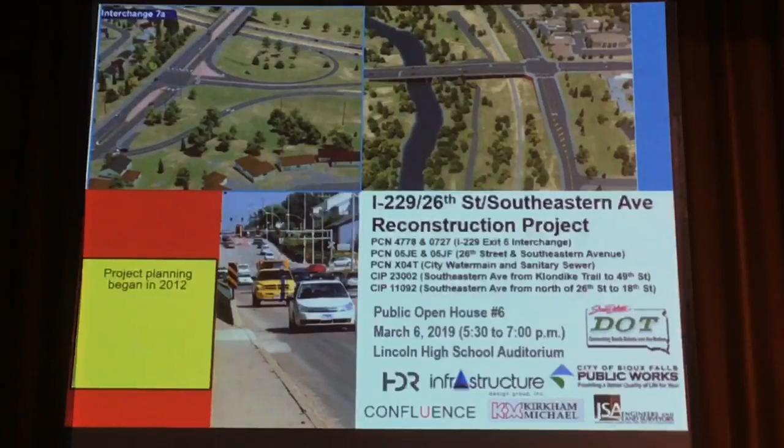To give you an idea of how long ago that was, in 2012 when we started the project, I had few, if any, gray hairs. And now, ouch. My kids tell me that I look more distinguished and mature. My wife says I just look old now. But whether it was just the time factor or the stress of the project, I don't know. Like I say, it's been a privilege to be part of this type of project.

We had our first public meeting in July of 2012, and I would like to ask, were there any of you here tonight that were at that very first public meeting in July? We have a few takers on that, yes, thank you very much. Then we had our last public meeting, number 5, in May of 2016. So we are now on public meeting number 6. Was there anyone here that was at all of the previous 5 public meetings? Yes, we have some takers. Thank you very much for being part of this process.

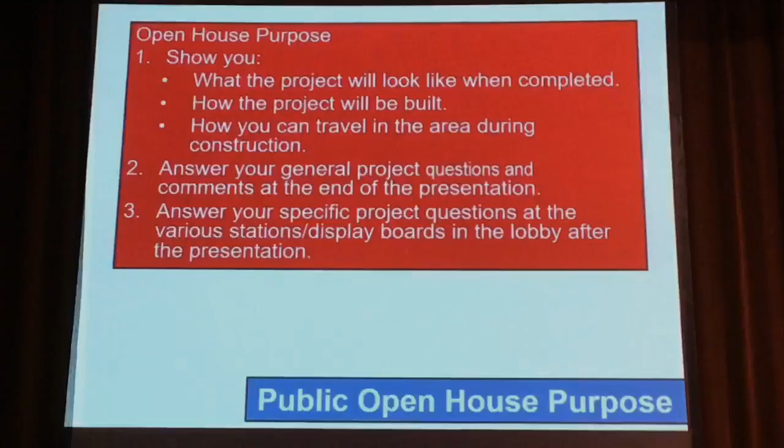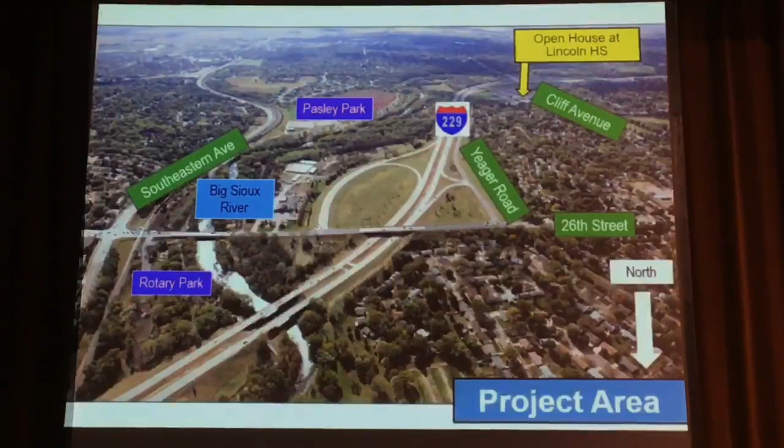Here we have our project area, and just a couple of highlights here. 26th Street is going across the screen right to left, and we're looking south on I-229. Here is Cliff Avenue on the right side of the screen, Southeastern Avenue on the left side of the screen, and we are all sitting here tonight now in this Lincoln High School auditorium. This area here, Rotary Park, when these pictures were taken, that was a kind of a wild tree area.

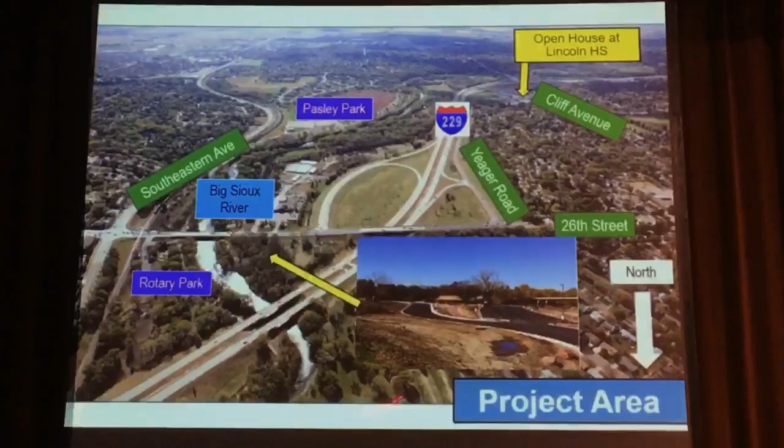What you saw last year was all of those trees being cut down and a parking lot and some buildings going up. We didn't quite get all of the playground features finished last year, but we will get that done early this year. The reason for that new Rotary Park was that the old entrance to Rotary Park, right here, when we raise up 26th Street, that entrance to the existing Rotary Park will be cut off, and there will be no way to get to it.

So we have Rotary Park over here, and many of you saw this pedestrian bridge going across the Big Sioux River, right about in that area, and that will connect the new Rotary Park with the old Rotary Park.

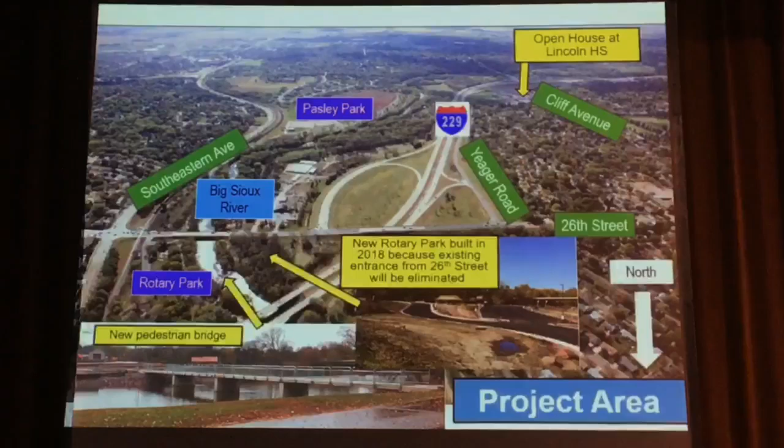So you saw some work being done last year, and I should say, can everyone hear me with the microphone here? Maybe the screen is a bit small, but hopefully you can at least hear me. Okay, hang on a second.

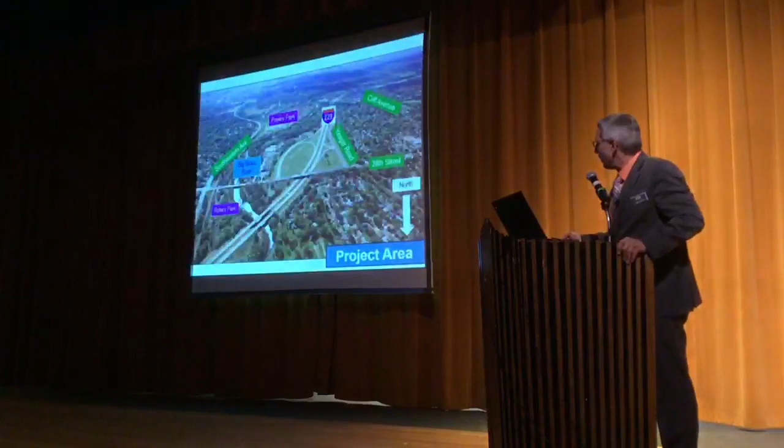And we're going to go now to some animations. This is the interchange, looking now towards the north with I-229 to the north, 26th Street going across your screen like this. This is what it looks like today. Way back in 2012, 2013, we considered up to 20 different options for improving this interchange and making it a safe and traffic efficient interchange.

And I'm going to show you one of the animations that we did in 2014. I'll start this. It'll come right up here.

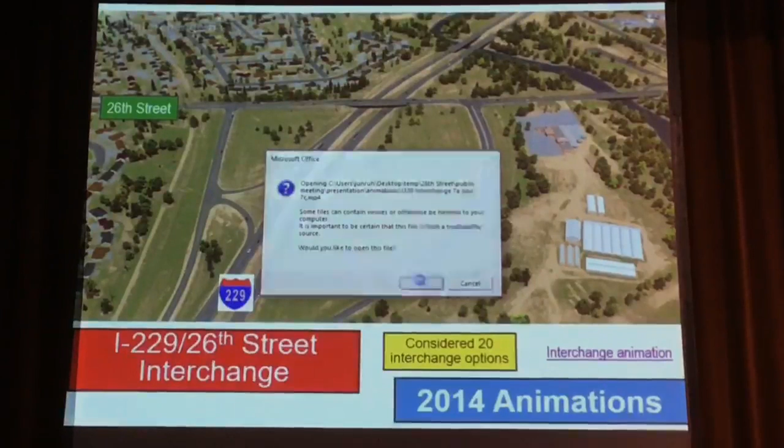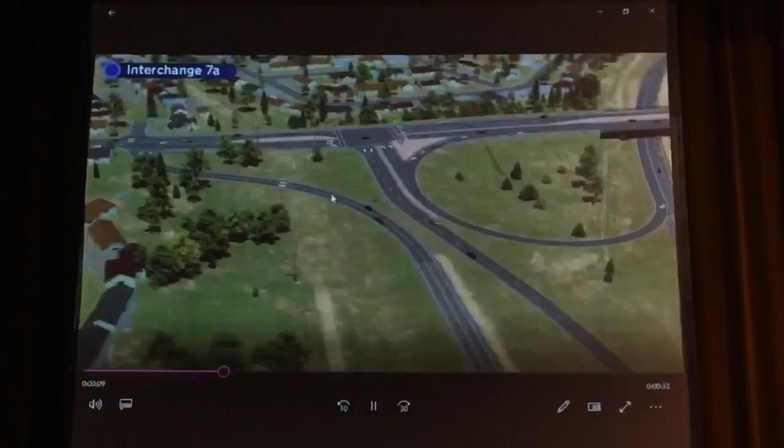Okay, this is an animation of what the interchange will look like when it's completed, and I will stop this partway in and give some key points. All right, so we're looking, this is pretty much toward the northeast. This direction here is 26th Street. Some things I want to point out.

Yeager Road now connects to 26th Street. When we are done, Yeager Road will be curved around and will connect to 26th Street over here across from Frederick Drive. The I-229 ramps will connect to 26th Street where Yeager Road is now. If you are traveling south on I-229 and want to get onto 26th Street, you'll come around this loop, and this loop will then connect to 26th Street.

If you want to go east on 26th Street, you'll have your own lane all the way over to Southeastern Avenue. So you see 3 lanes on 26th Street going over to Southeastern Avenue. When you want to get onto I-229, you'll get on the ramp here and you'll get directly onto I-229. You will not have to turn again at Yeager Road like you do now.

I'm going to let this continue to run here. And this other scenario that you're going to see is essentially the same thing, but just from a slightly different perspective. And the one thing I want to point out here is this intersection, significantly larger than the existing intersection.

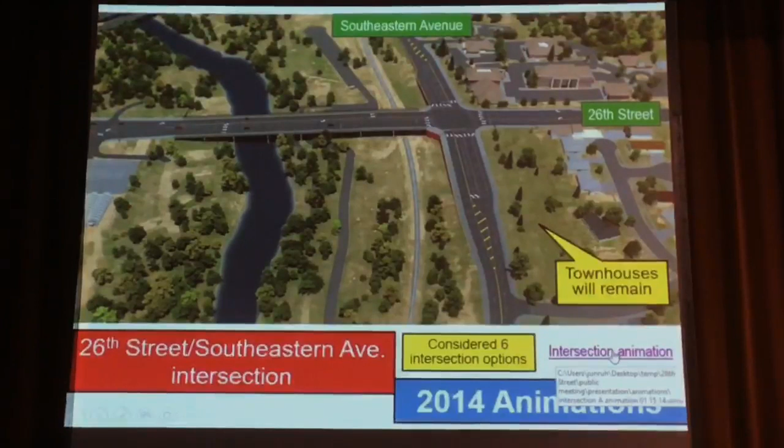So we're going to start this and just let it run, and that will show you what this will look like when it's finished. A very dramatic difference from what it looks like now. And I'll do just a couple of comments as we go around. Again, these animations really helped people and all of us on the design team just understand what it would look like. Here we're looking on Southeastern Avenue to the south.

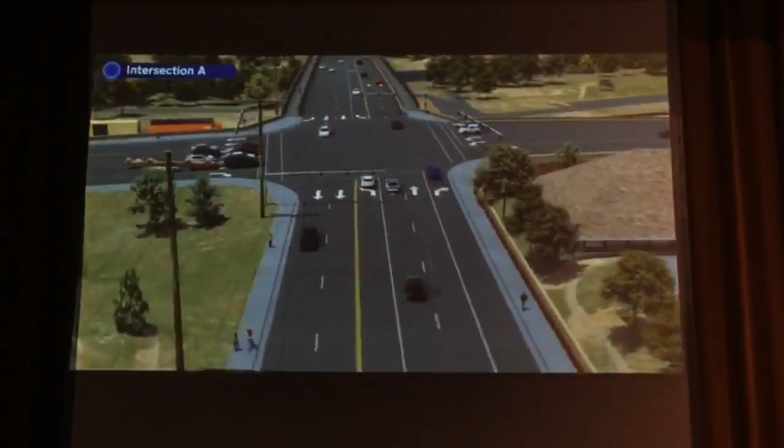Here's the railroad tracks, and here's the bridge over the railroad tracks. We'll have dual left turn lanes on Southeastern Avenue and four through lanes, 2 lanes in each direction on Southeastern Avenue. Here we're looking west on 26th Street, and not much capacity increase over here.

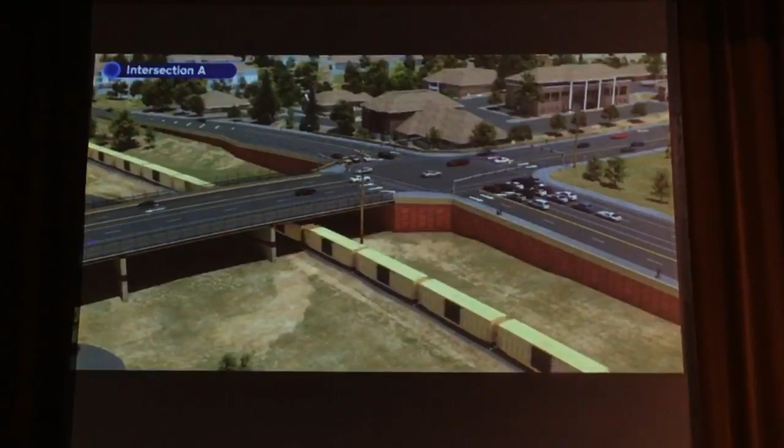That will stay the same on the east side of Southeastern Avenue. Now we're looking north on Southeastern Avenue. Here's 26th Street, with dual left turn lanes to get onto 26th Street. That movement backs up every day, as all of you are aware. Notice the nice wide sidewalks along the sides of the streets, another marked improvement for this area. But unless we had these types of animations, it would be very difficult to comprehend what this will look like when we're done. All right, we're going to move on to the next slide.

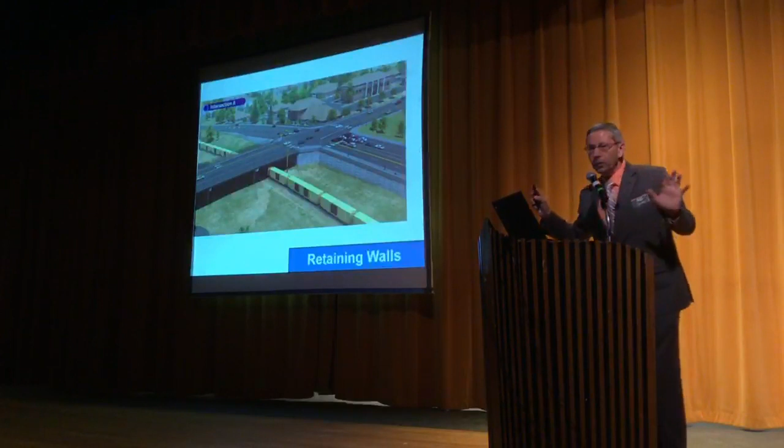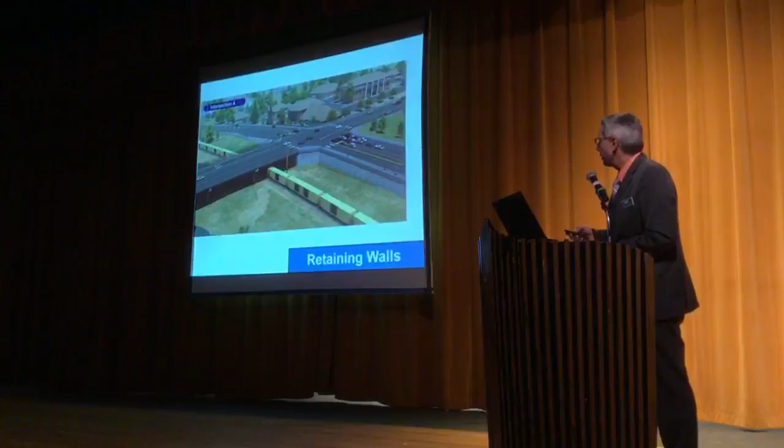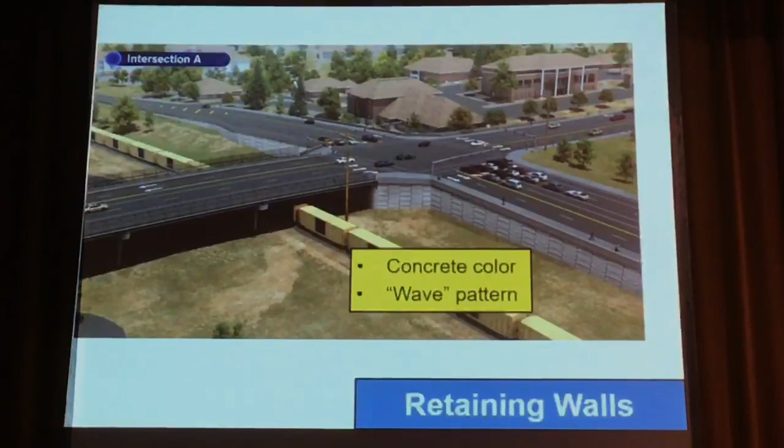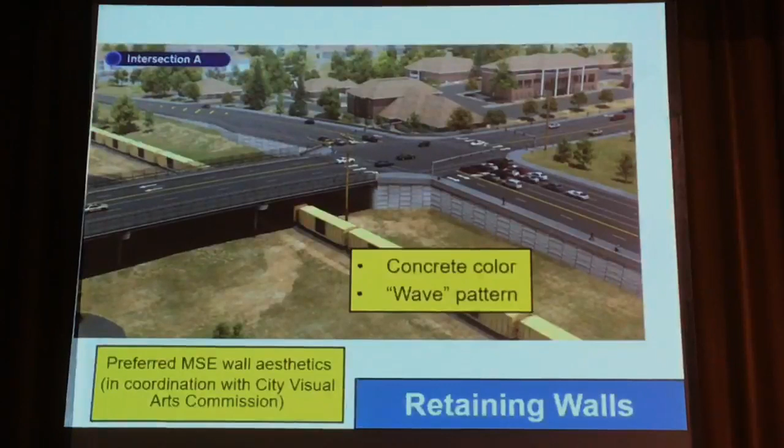You saw the red coloring on those walls in the animation. Well, since then we've done some additional work, and what you see here, these gray colored walls, is what will actually be built. More of a concrete color, and we're going to use a wave pattern on these walls to match the setting of the park system, the Big Sioux River, and the Big Sioux River Trail. These aesthetic treatments were developed in coordination with the City Fine Arts, City Visual Arts Commission, so we had quite a bit of input on how to make these things look very nice.

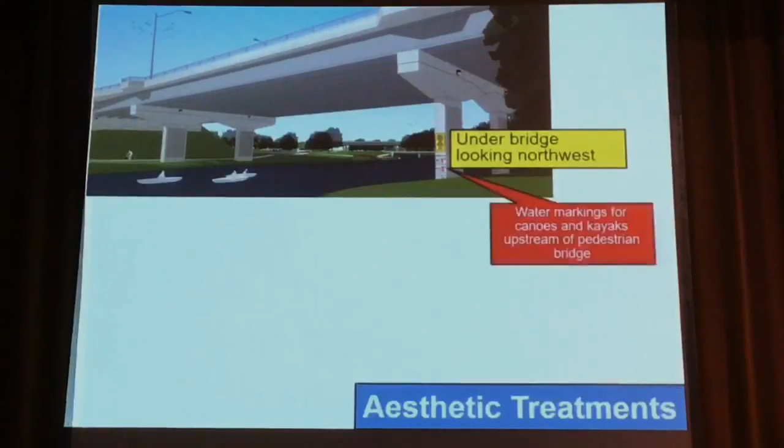Here's a slide looking underneath the new bridge. This is looking towards the new Rotary Park. Here is the pedestrian bridge going across the Big Sioux River. On the bridge pier, there will actually be red numbers that will tell canoers and kayakers that if the river level gets up to one of those, you probably want to get out of your canoe or kayak and walk around that bridge. Although I'm sure there will be many people that try to scoot underneath the new pedestrian bridge.

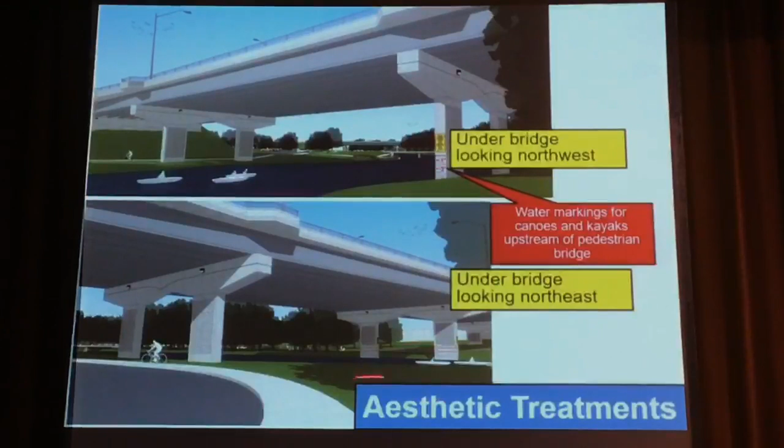Here we are looking underneath the new bridge towards the northeast, and here is that big retaining wall along Southeastern Avenue that you saw. Here's the Big Sioux River. Again, we went with a concrete color and a wave pattern on, for example, the edges of the bridges and on these bridge piers. We think that will also be very pleasing to look at, and again, this was developed in coordination with the City Visual Arts Commission.

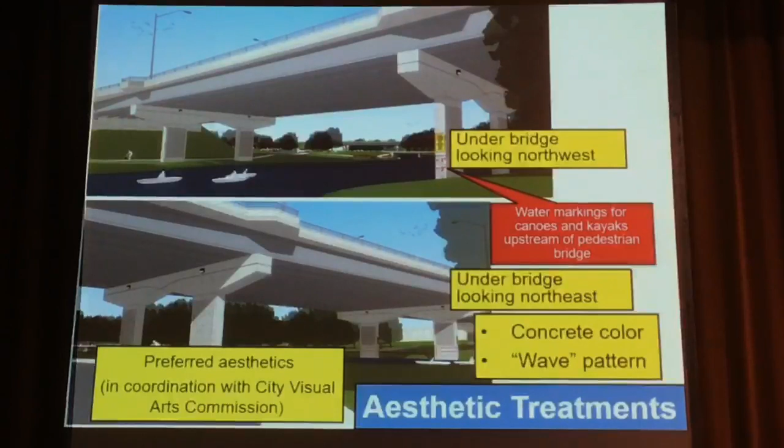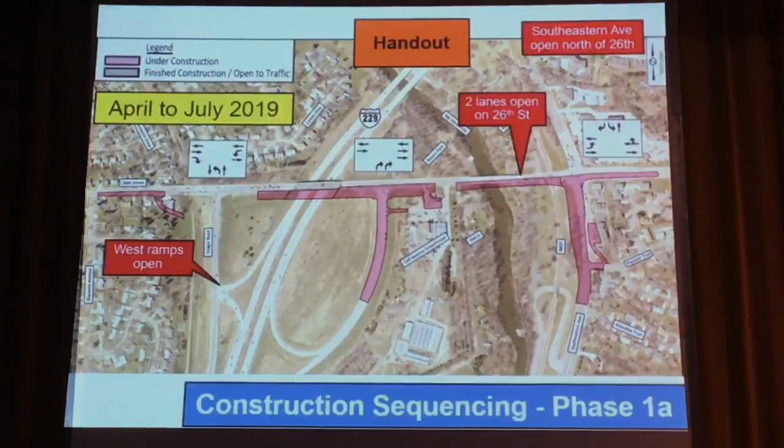Again, I apologize for the small screen, somewhat hard to read, but we will keep 2 lanes of traffic open on 26th Street throughout construction. Southeastern Avenue north of 26th Street will remain open during phase 1A. The west ramps that connect now to Yeager Road will also remain open. We'll be building the south side of 26th Street, essentially widening out to the south side, and we'll also be building this northbound on and off ramp, but we will maintain 2 lanes of traffic on that, for the people coming off of I-229.

As you know, this movement backs up onto the ramp, onto I-229 nearly every day, so we're actually going to make 2 right turn lanes to go east on 26th Street. We will also be building a new access from the ramp to the Cliff Avenue greenhouse site, and we will maintain the existing access over here to the Cliff Avenue greenhouse site during this phase 1A.

What happens on Southeastern Avenue to the south is that we will be closing it, closed to Klondike Trail right over here. Then all the way down to 49th Street, the city will be doing a project involving some sanitary sewer work and overlaying the existing pavement, with 2 lanes remaining open and 2 lanes closed on Southeastern Avenue all the way down to 49th Street. It was an opportune time to do these projects together while traffic is impacted all in just one year.

Notice here there's no left turns going onto this ramp, so that will be a traffic impact. Also, there are 2 right turn lanes coming off of the ramp, and they will merge very quickly to 1 lane going east. We recognize that will be a constraint for traffic and probably a site of congestion.

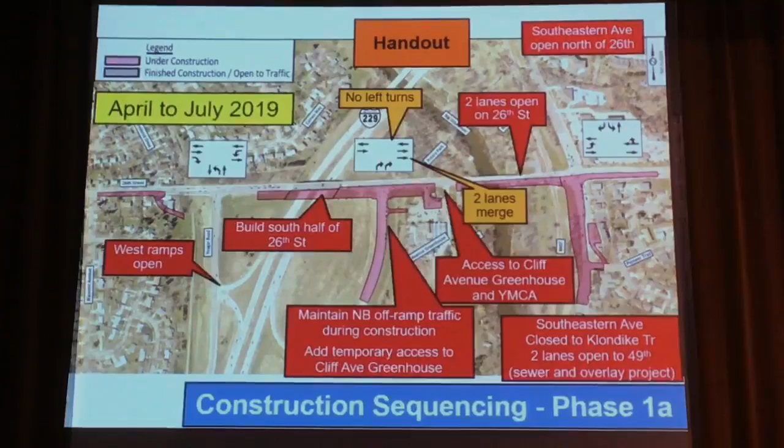Let's go to 1B. The only thing different here is what's shown in gray, which is what has been completed. This is in your handout, and it will extend from approximately July to the end of the 2019 construction season, probably November 30th, depending on weather. We will keep 2 lanes of traffic open on 26th Street, 1 lane in each direction. Southeastern Avenue north of 26th Street will remain open to traffic. The west ramps will be closed for construction, and Yeager Road will also be closed. We will continue to build the south half of 26th Street, but the east ramps will be completed, along with the new entrance to Cliff Avenue Greenhouse by that time.

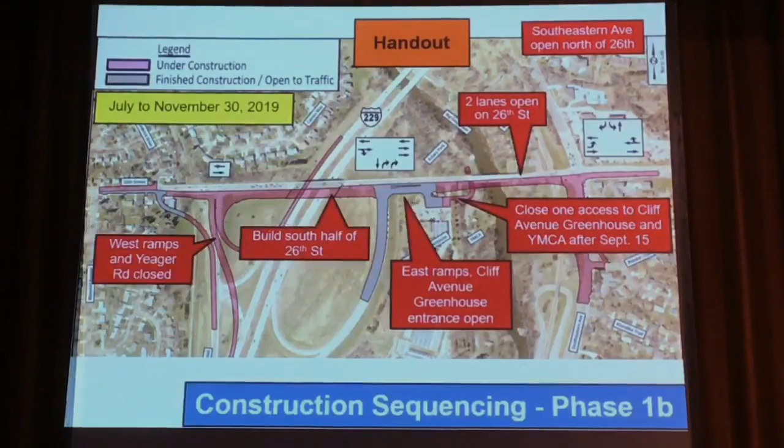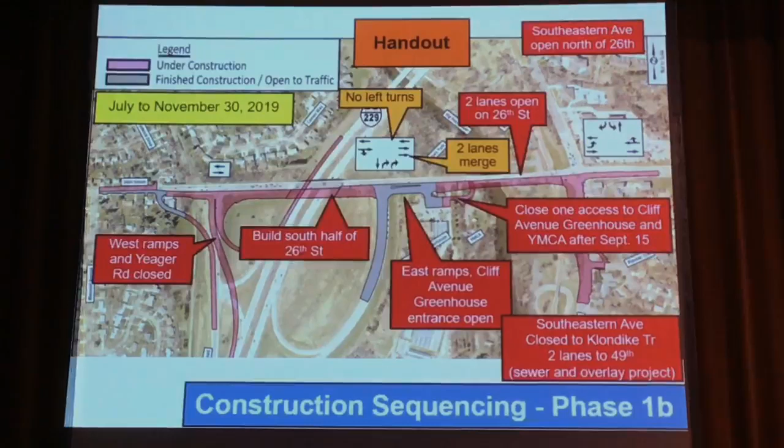Then we will close the YMCA and the other Cliff Avenue Greenhouse entrance, and YMCA will shut down their operations after September 15th, so all access to the YMCA day camp will end after that date. Southeastern Avenue will be closed down to Klondike Trail, then just 2 lanes of traffic all the way down to 49th Street. Again, no left turns, even though this ramp will be open. The congestion just won't allow us to permit left turns from 26th Street westbound onto the ramp, and those 2 right turn lanes will merge relatively quickly to 1 lane.

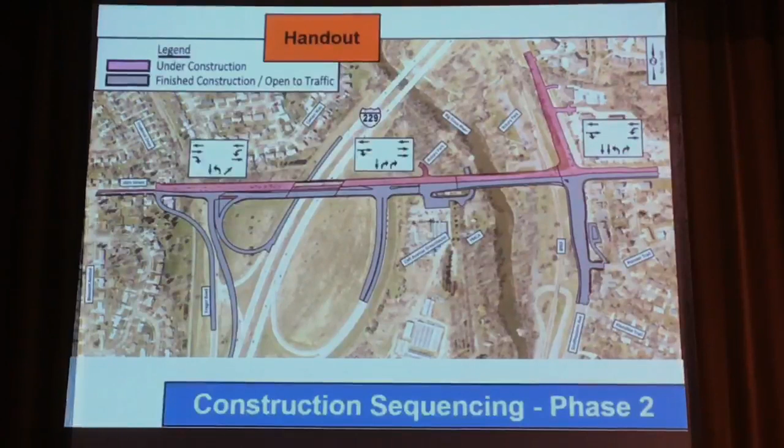Then in year 2, which we call phase 2, this is also part of the handout you received. This will run from April to November of 2020, the 2nd year of construction. Now all of the new lanes on 26th Street will be open, and we will keep 26th Street open to 2 lanes of traffic, 1 lane in each direction. This will now be on the new lanes and the new bridge over the Big Sioux River and the railroad tracks, and all of the ramps will be open. This will be a dramatic improvement in traffic conditions compared to year 1.

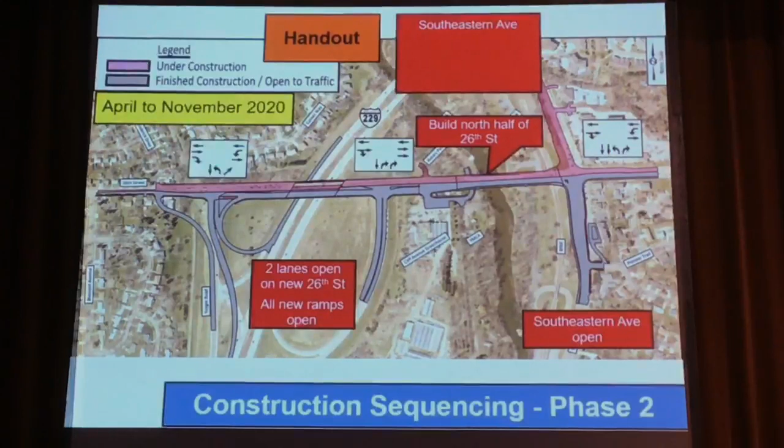We'll be building what you see in pink here, the north half of 26th Street. Southeastern Avenue will now be open south of 26th Street, but north of 26th Street it will be closed to the River Ridge Oral Surgery driveway. North of that, Southeastern Avenue will be reduced to 2 lanes, maintaining only 1 lane of traffic in each direction all the way to 18th Street. During that time, the city will be widening Southeastern Avenue so that when we're done, there will be 4 lanes all the way from 26th Street to 18th Street - a dramatic increase in capacity.

Some pain to get there, however. Again, we will not allow left turns at this ramp, and the two right turn lanes will merge down relatively quickly. So that's going to be a traffic constraint that all of us will have to be aware of.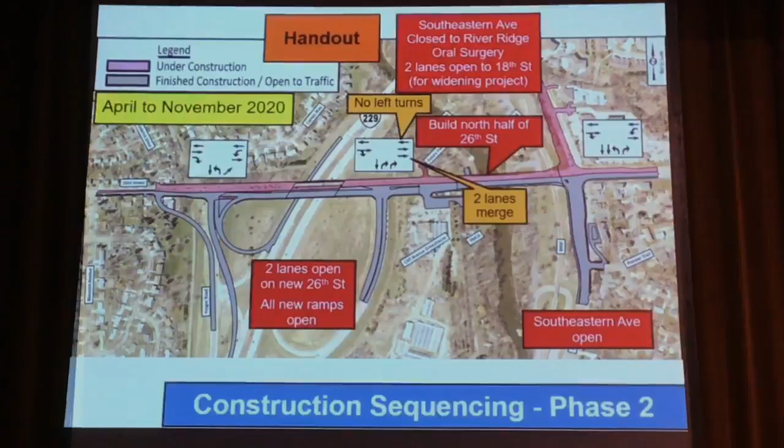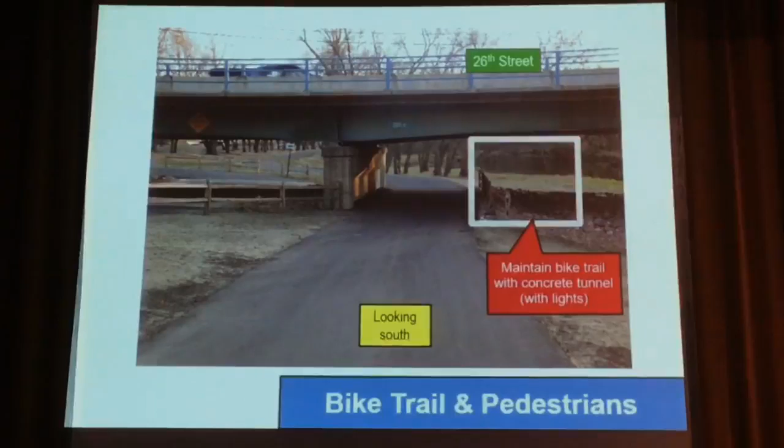What happens with the bike trail and pedestrians? Here you see a picture looking underneath the existing 26th Street Bridge along the bike trail, looking south. What we are going to do is install a concrete tunnel underneath the existing bridge, extending out quite a ways - actually a 200-foot long tunnel - going through much of the construction zone. We will have lights inside that tunnel, so you'll be able to go through it and still use the bike path on each side.

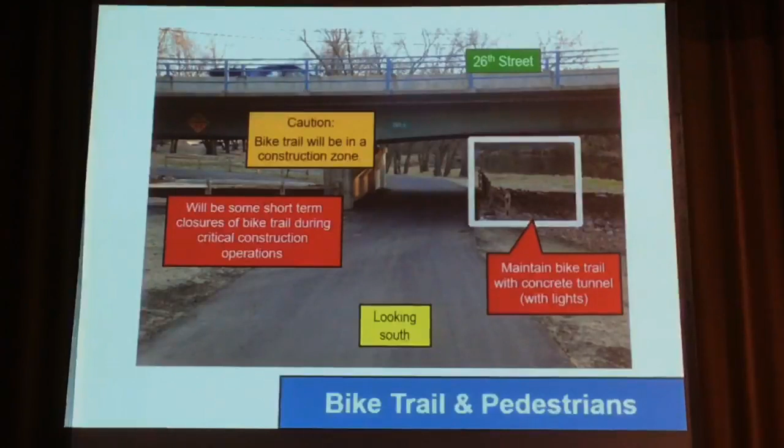There will, at some times, be short-term closures of the bike trail for critical construction work. Just remember that the bike trail will really be in a construction zone, so for users - walkers and bikers - it will still require quite a bit of caution. We'll have lots of barriers and signs, but it will still require caution by everyone who uses the bike trail.

Traffic. This is why we're all here tonight, I think, is to see what happens with traffic. Here you see a picture of 26th Street like you see it pretty much every day. Southeastern Avenue back here, 26th Street right here.

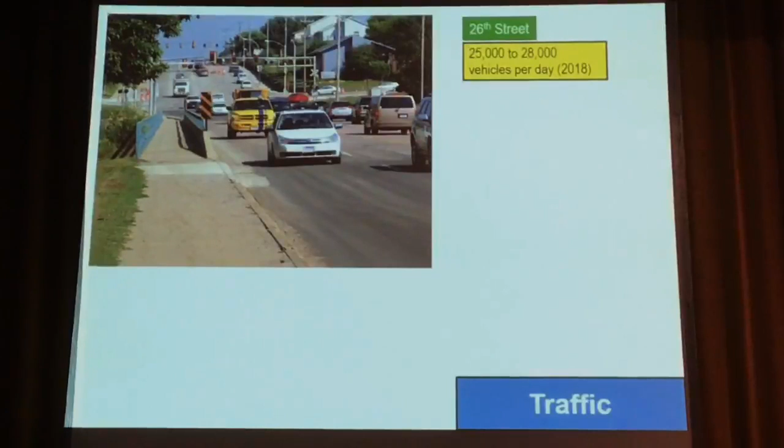Today, there's somewhere between 25 to 28,000 vehicles per day on 26th Street, depending on where you're at, but within our project limits, 25 to 28,000 vehicles per day. On Southeastern Avenue, there's between 8,000 and 12,000 vehicles per day that travel on Southeastern Avenue every day.

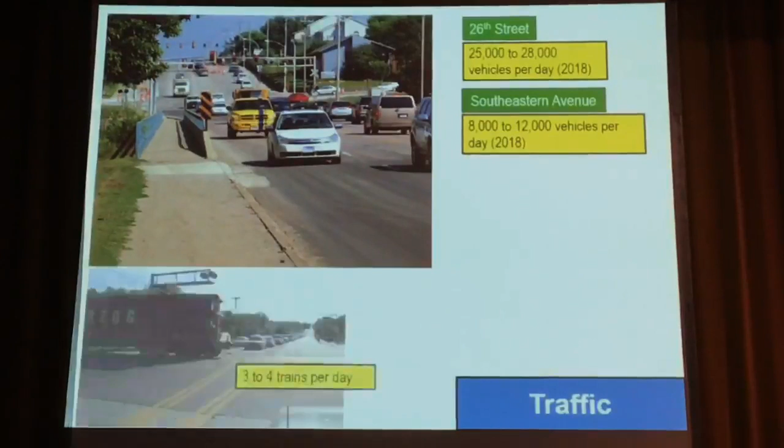We have about 3 to 4 trains per day that cross 26th Street. And invariably, it seems like one of those crosses right during the peak traffic periods. I think we're all well aware of that, and we've all sat in that traffic backup that you see on the slide here. That's what we're dealing with.

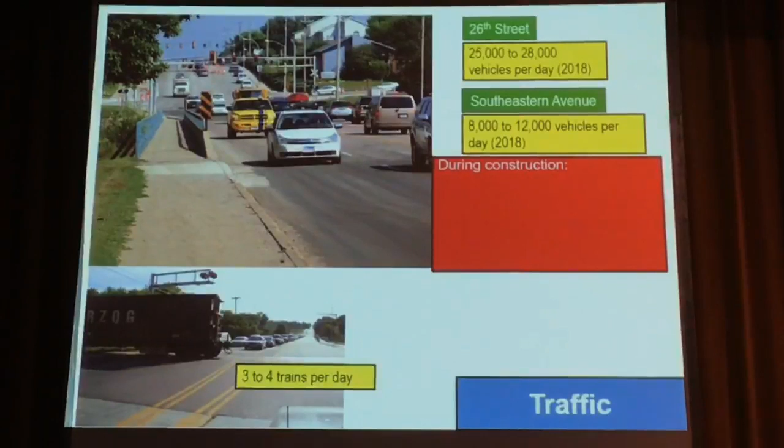Okay, hopefully you can see this slide. What happens then during construction? Well, 26th Street goes from 4 lanes to 2 lanes during construction. Southeastern Avenue at some point will be closed either north or south of 26th Street. And the railroad tracks will also be making some changes. There will be just 2 lanes crossing the railroad tracks, and there will be arms that drop down from new railroad signals that will be installed. So pretty significant reduction in the amount of traffic that can get through this area.

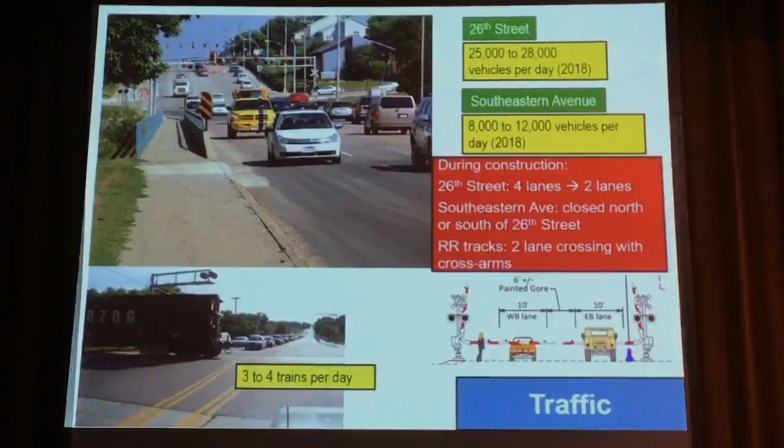And I said, what you want to do then is go over to Sycamore and take a left turn at Sycamore, and then stay on Sycamore, go right through the 26th Street intersection, and then turn left at 10th Street, and then take 10th Street to downtown.

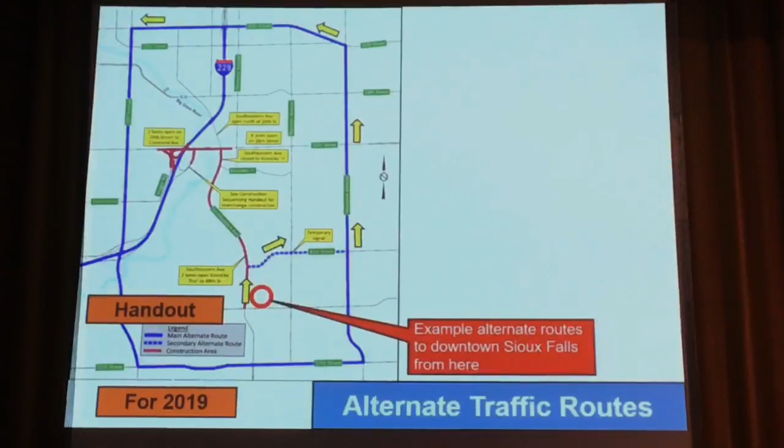Okay, we are all well aware that 10th Street has a lot of traffic on it already, and so we're saying, okay, we're going to put more traffic on it. So I said what you might want to also consider is if 10th Street, if you're having trouble getting through there, you could also turn left on 26th Street here from Sycamore and go over to Southeastern Avenue. Keep in mind, in the first year, Southeastern Avenue will be open north of 26th Street, and I suggested then you'd be back on your old route to get to downtown.

For each person that drives this area, there's going to be some uniqueness in where you're coming from and where you are going to. So this is just an illustration of how one person could navigate it.

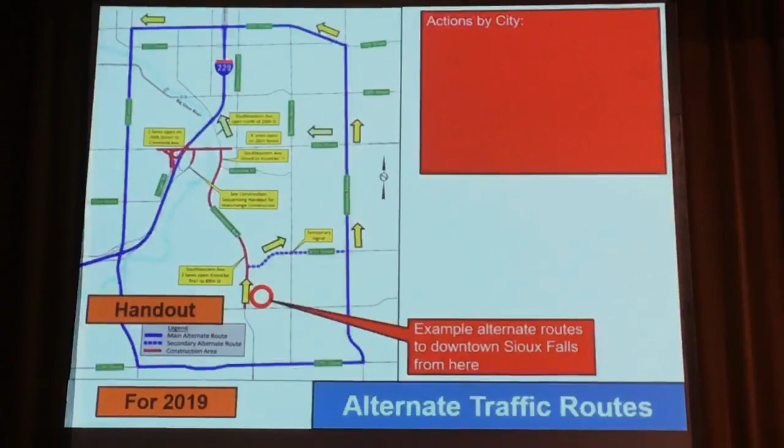Now, the city is going to be doing some very specific things, and if you can't see these, I will just tell you what they are. First of all, the city will be adjusting the signal timings on these alternate routes. And these alternate routes are the ones that are in blue here. Basically 10th Street on the north side, 57th Street on the south side, Sycamore on the east side, Cliff Avenue on the west side, and I-229 will also remain open.

So if you're trying to use the 26th Street interchange and there's ramps that are closed, you can use the 10th Street or Cliff Avenue interchanges instead. But the city will be adjusting the signal timings before the project and during the project on all of these alternate routes to adjust to what the traffic is really looking like out there.

The city will also keep these alternate routes construction-free while we have all this additional 26th Street and Southeastern Avenue traffic on these alternate routes. The city will also have cameras up on some of the poles to watch what's happening at each of these intersections, especially in the project area where we're working. They will monitor that in real time at City Hall and can adjust the signal timings in real time to reduce the delays people are experiencing.

Okay, what can commuters do? These are the things that all of us as commuters can do. First of all, like I told my daughter, you will probably have to try various routes. One route might be really blocked up and you might want to try a different route the next day, and it might change through the course of the construction season, so you'll just have to try different routes. You might also want to try various time frames for getting to and from work. That's not an option for everyone, but if it's possible, you might want to consider going at times when traffic isn't quite as busy.

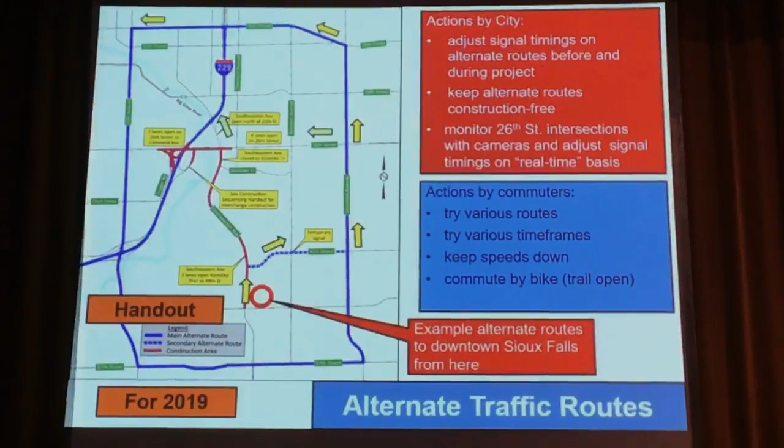How about commuting by bike? As I said, the bike trail will remain open, so that's certainly a possibility, and you won't be fighting vehicle traffic. So that's a possibility as well, certainly when the weather is nice.

Finally, we do ask that people be patient. I'm as aware of it as anyone that when you're sitting at a traffic light, two minutes seems like the end of the world. There was one signal I thought every time I went through it took forever to get through, and then I timed it once and it was like a minute and a half. It's like, oh my gosh, that's a very short amount of time, but when you're sitting there, it seems like forever. There will be times when at some of these signalized intersections it might take two cycles, even three cycles to get through, and we will just ask for patience. When we're done, this will be a wonderful project, and traffic will move very smoothly through this area and much more safely. But during this two-year construction period, we will be challenged. I think all of us are aware of that.

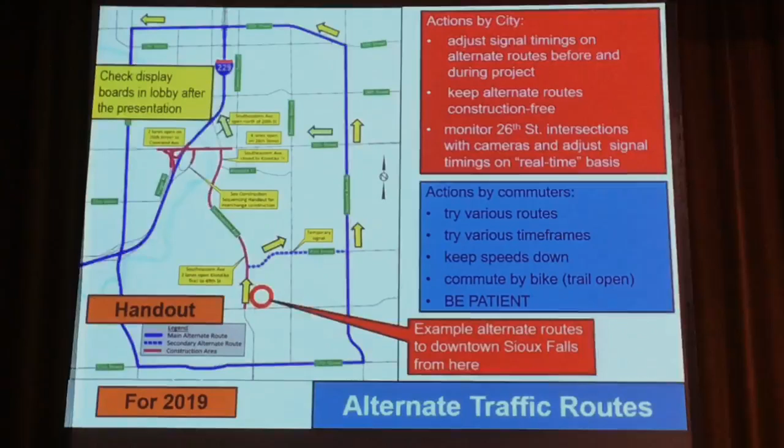If you have specific ideas or questions about how to get around the area, we actually have two of these display boards set up in the lobby, and two gentlemen back there that can direct you. If you give them the place you're starting from and going to, they can make suggestions for specific alternate routes.

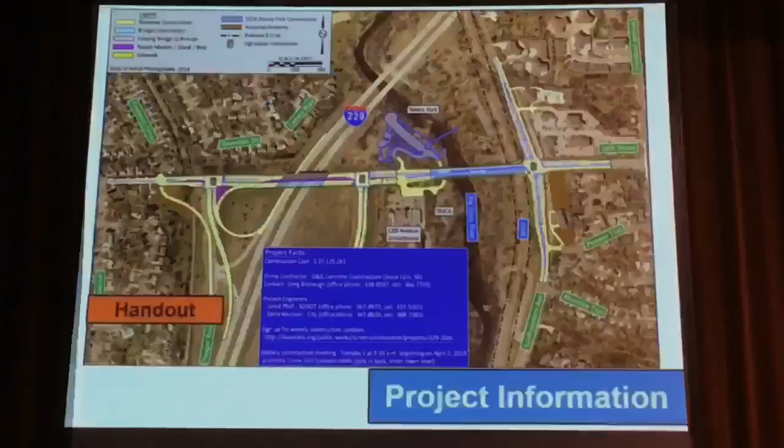Okay, this is a map that you also see, I'll blow the lettering up. A handout that you received, with some project facts. Again, you're not going to be able to see this due to the size of the screen, but there is a significant investment with this project. $37 million is what the construction cost will be for this project.

The city and the South Dakota Department of Transportation are making a very significant investment, an investment that really benefits us and our descendants probably for one or two generations. Something like this is expected to last 75 to 100 years. So it is something that we want to make look nice, we want to make very functional, and we want to make enjoyable for everyone today and in the 20 to 50 to 75 years, even up to 100 years in the future.

That being said, we have some people we want to introduce. The prime contractor is D&G Concrete Construction, and I'm going to ask these folks to come up so you can see a face. These phone numbers you see are in your handout as well, so don't worry about seeing it up there, you can look there. The prime contractor is Greg Branagh of D&G Construction out of Sioux Falls, South Dakota. Most of you are probably aware of the Louise Avenue project improvement that D&G Construction did in 2017. There are some phone numbers there, office phone and cell phone for Greg.

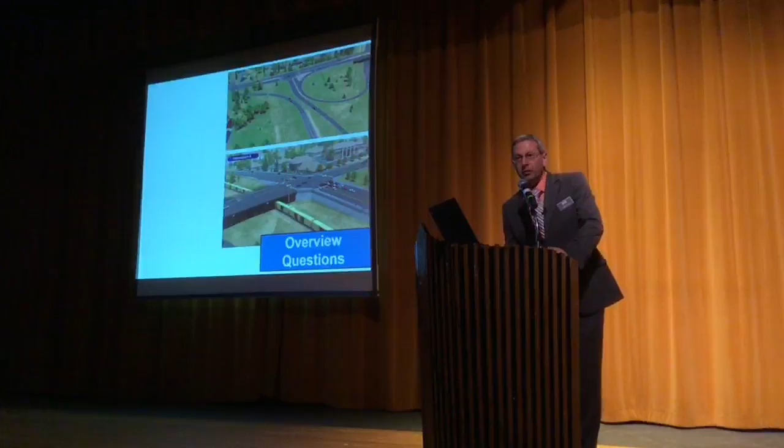Okay, excellent, that's a fantastic question. For those who didn't hear it, was there consideration for a ramp from westbound 26th Street directly onto the interstate? This system is actually designed to allow for that to be added in the future, if it's warranted. At this point it wasn't warranted, but maybe 20 or 30 years out, we designed this facility so it could add that ramp to go from westbound 26th Street directly onto I-229 northbound. During construction, though, that's really not an option, which is why we're basically not allowing that left turn from 26th Street onto the I-229 northbound on-ramp. Is that an adequate response, Shannon?

Yep. Okay, thank you. If you would, you don't have to give your name, but just speak into the microphone. We live on Klondike Trail, and I can see traffic traveling from 49th over to Klondike, shooting up Klondike to Cleveland, and then going downtown. You haven't mentioned anything about Cleveland Avenue and the connection that Cleveland and Klondike has to Southeastern. We already are experiencing a lot of traffic coming from Sycamore, Benson, Cleveland — they are coming down that road very rapidly, I might add. We have children in that area, and those cars are zooming down towards Southeastern. Right now they're connecting so they can go north, but I can see a lot of traffic heading through that area, and that concerns me. Is there any suggestion on what can be done — either like a live body laying on the road so we have a speed bump, because that will happen. My grandson almost got hit on that road.

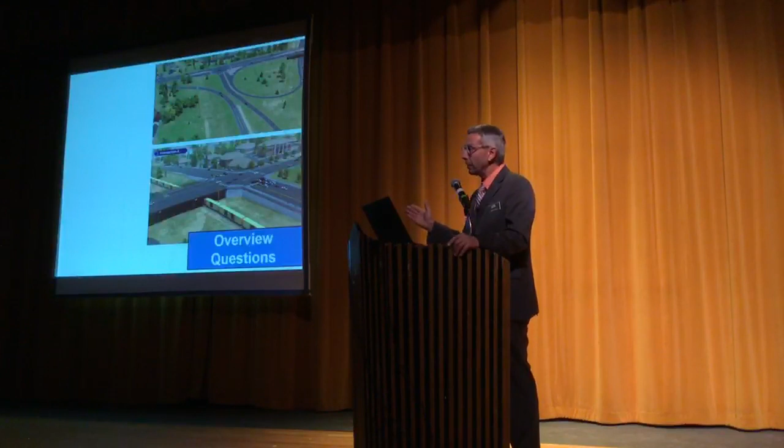Those were designed so that when we see a flood coming, we can actually drop them down - they hinge down, so we really couldn't do anything real fancy with those. They also have pins so that if they're up and a flood comes through quickly, if something hits them like a log, they will actually just break over - the railings will just fall down by themselves. So we were somewhat limited in what we could do.

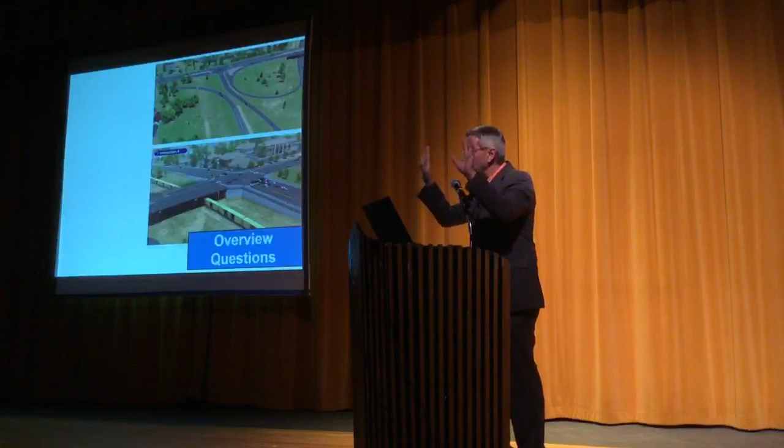That's where you'd probably want to put something nice, on the railings. If you saw on the 26th Street Bridge, we really tried to do some nice things on the railings. But you are right, we were somewhat limited on that, and that's probably the least sightly part of the bridge.

Is that a reasonable statement? That explains that very well. Thank you, and I have one more comment about the gray hair - that's when you wear a cap. Okay, thank you, I appreciate that.

Hi, Anthony Pizer. Just a comment and a question. First, the comment is I can tell a lot of thought went into this, and I just want to say thank you to you and your team for your consideration on this and improving. Thank you, appreciate that.

The question - you mentioned the temporary light at 41st and Bonson as a kind of overflow mechanism. Is there any way to make that permanent?

A lot of times those temporary lights do end up being permanent, and I know the city is looking at improving that intersection even more than just with a signal. But that's probably all I want to say about that. Typically those temporary signals do become permanent, so that's a possibility here. It will have those span wires, the wood poles and the span wires, so it'll be somewhat unsightly. But you see a lot of those around town where they work well, so they just keep them in place. So that is a very good possibility. I don't know the answer for sure, but in a lot of places that is what happens.

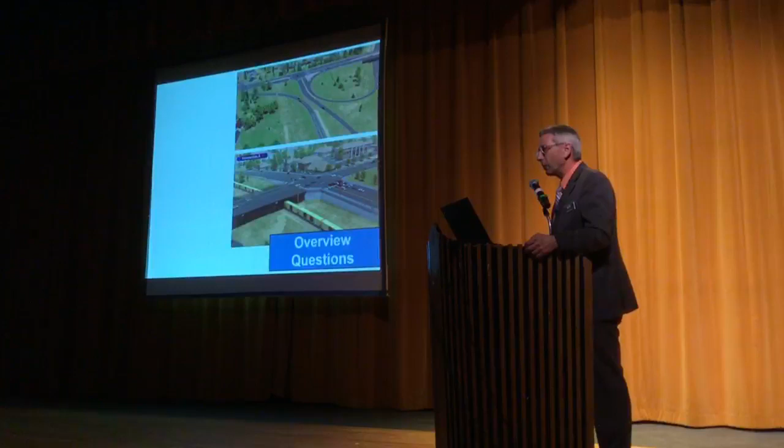Like I said, it would be mostly daylight hours. I believe the contractor gets a special permit if he's beyond - what is the time that if it's beyond, they have to get a special permit? Is it 9 o'clock? 9 or 10 o'clock, so that would take some special consideration.

Okay, and again, that's why we went with the 2-year time frame so that we weren't forced into that kind of a scenario. If it does come to that, like I say, it takes a special permit by the city, and you'd probably have opportunity to voice your concern about that at that time. But yes, construction noise is certainly a concern.

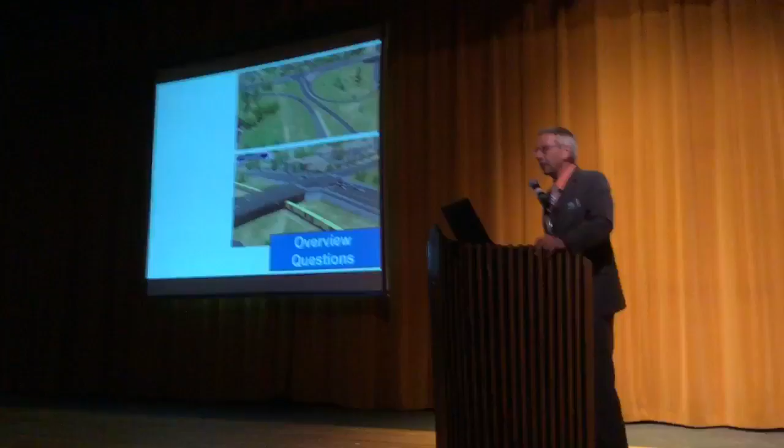And it starts at dawn? Sometimes it will, and I think, as a matter of fact, that's one of the reasons we would have those weekly construction meetings - we would ask for participation at those if it becomes really obnoxious for you. Come voice those concerns at the weekly construction meetings, and if you're hearing too much noise, then come to those and let us know that's a problem.

Okay, I'm just anticipating too that there might be a need for more police presence on 26th Street. In the evenings in the summer especially, we get a lot of traffic that backs up, and if there's only 2 lanes, I can see that being a headache, but I will check in at the meetings. Okay, alright, thank you very much.